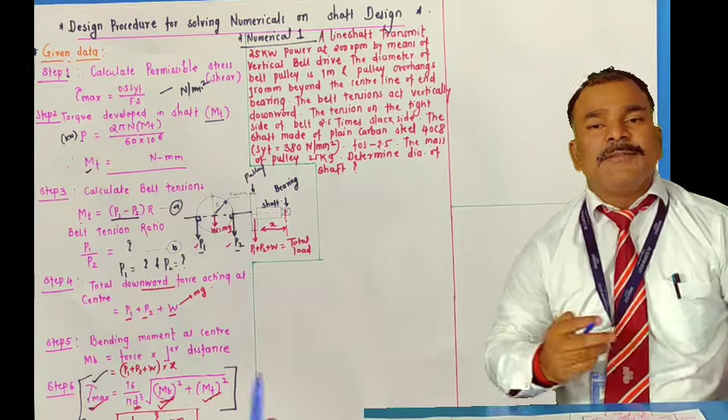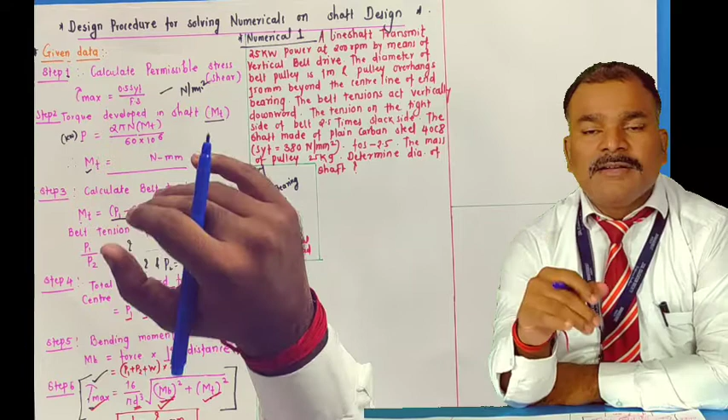Hello students. So now we will solve the numerical which we have seen in the previous session's design procedure. First of all, as I told you in design procedure, we'll have to read the numerical correctly, carefully, and then write down the given data. That would be your first prior step.

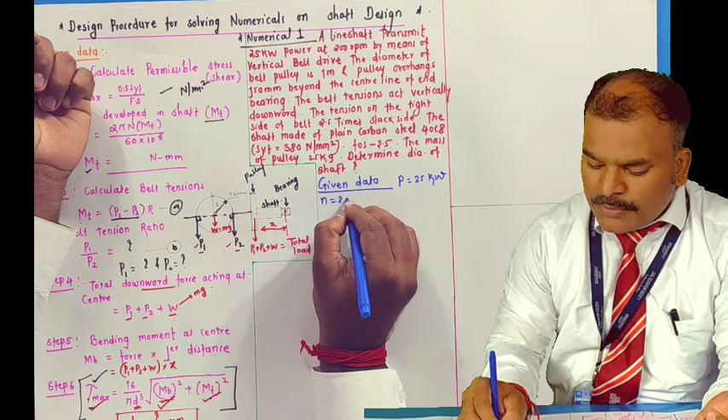So I'll read: A line shaft transmits 25 kilowatt power. So I'll write given data, P is equal to 25 kilowatt, that is 25 into 10 raised to 3, it will be in watt, at 200 RPM, by means of vertical belt drive.

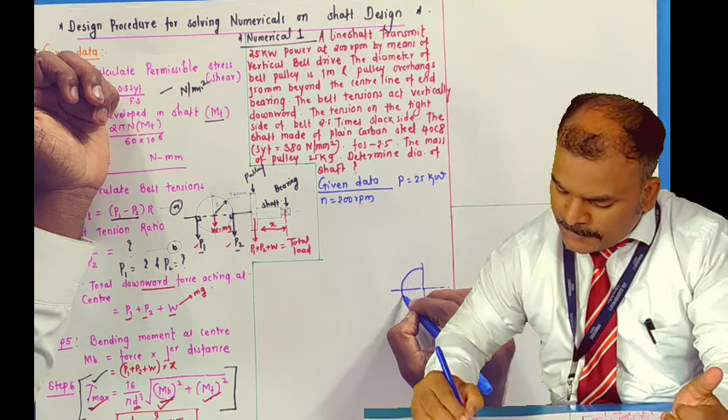So it is clear that belts are acting downward, tension on tight side and slack side is downward. The diameter of belt pulley is 1 meter apart. So I will draw here for sake of your understanding. This is the pulley, having diameter 1000 mm, so radius is 500.

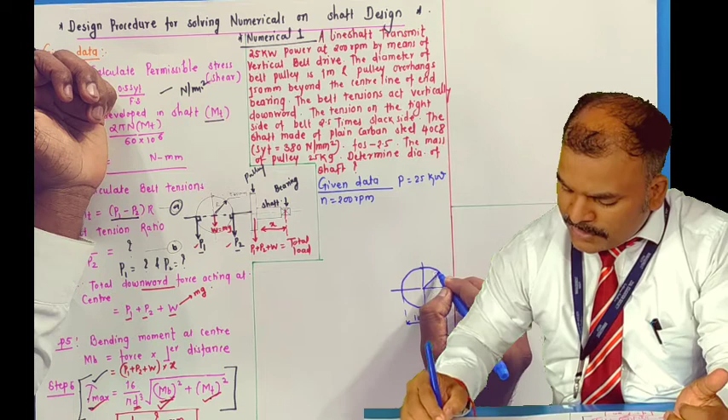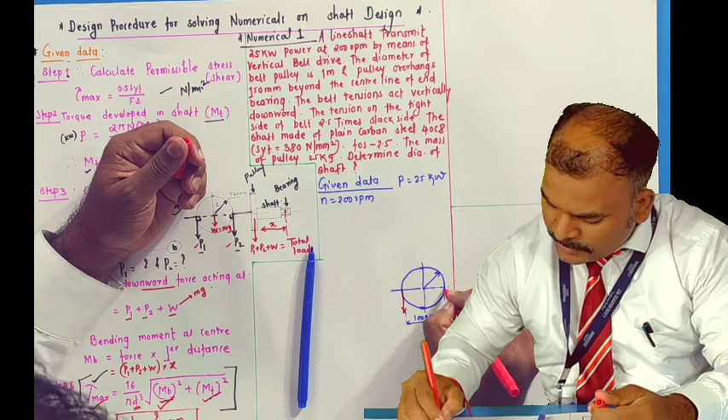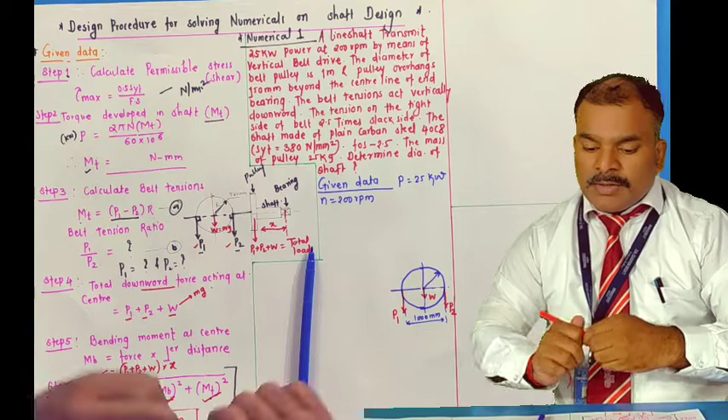Then on this the load is acting vertically downward. As I told you, P1 tension on tight side, P2 tension on slack side, and self weight of respective pulley. The diameter of belt pulley is 1 meter apart, 1000 mm, and pulley overhangs 150 mm beyond the center line of end bearing.

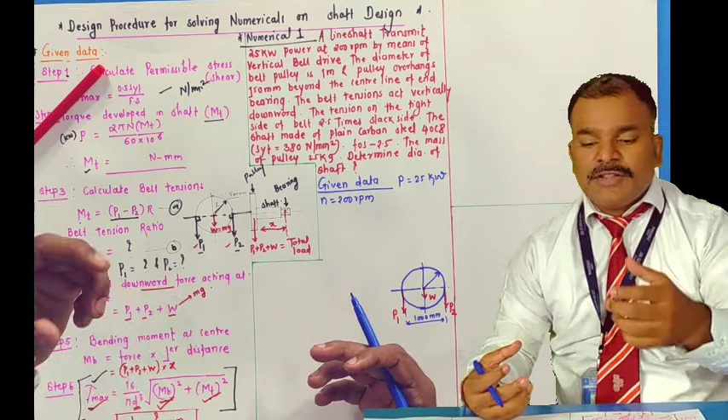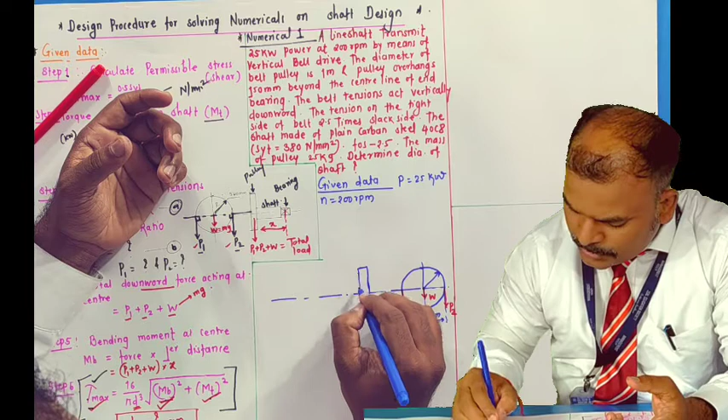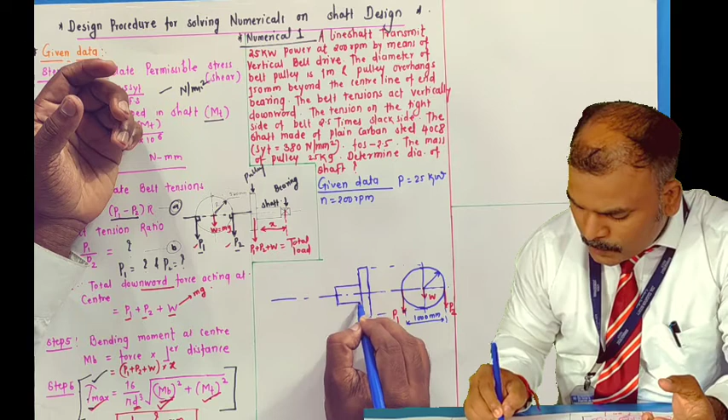Now it is very important to know where the end bearings are situated. Of course bearings are situated at end in most cases for giving the rotation. So I'll draw the diagram for understanding that. Here is your pulley structure, with respect to this. Then I will draw the shaft, and then I will draw here the bearings.

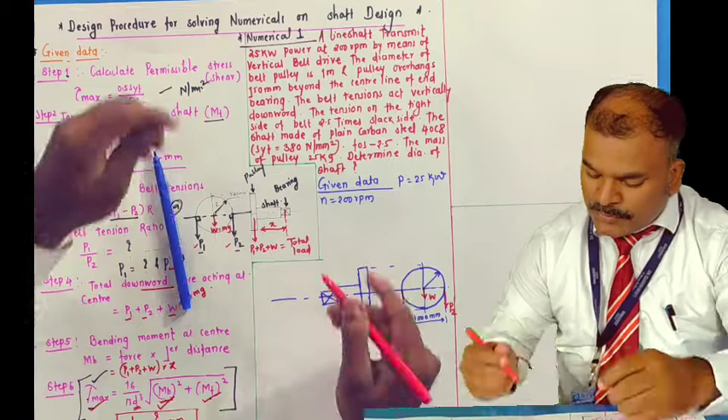Now, pulley overhangs 150 mm beyond center line of end bearing. So end bearing is this center line, and pulley overhangs, this distance they have mentioned 150 mm.

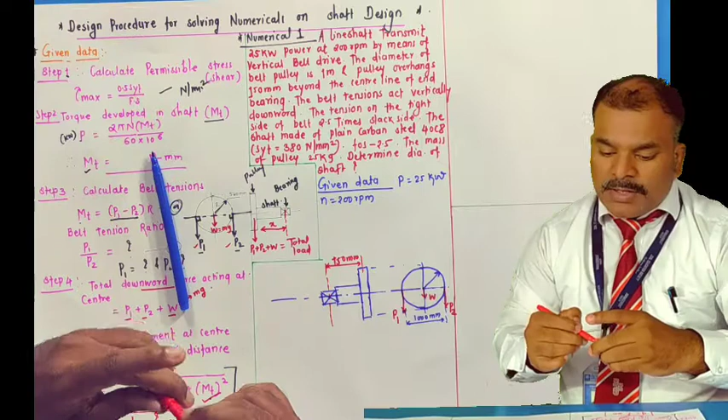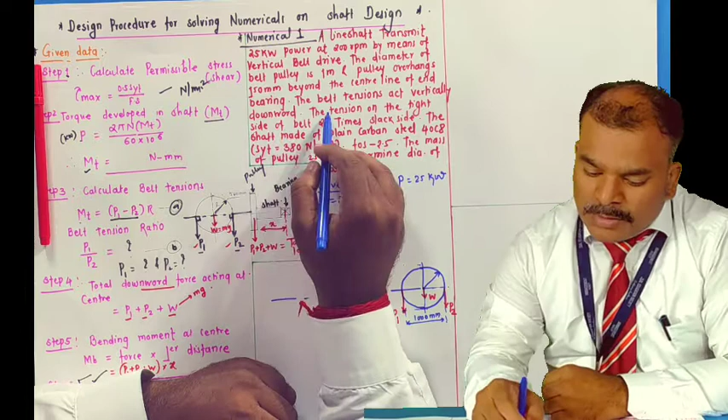After that, they have suggested the belt's tension acts vertically downward, so we have shown P1, P2. The tension on tight side of the belt is 2.5 times slack side. So I will write in given data, P1 by P2 is equal to 2.5.

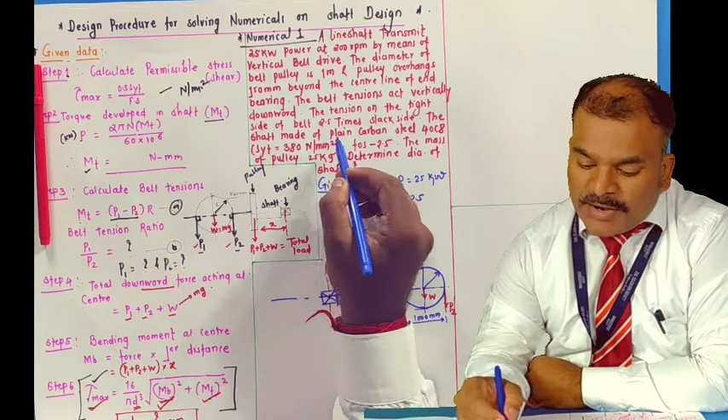They have given the shaft made up of steel, ductile material, steel 40 C8. Its SYT yield strength is given as 380 Newton per mm square, and factor of safety FOS we can say generally 2.5, and the mass of the pulley M is equal to 25 kg. Determine the diameter of shaft, that is small d.

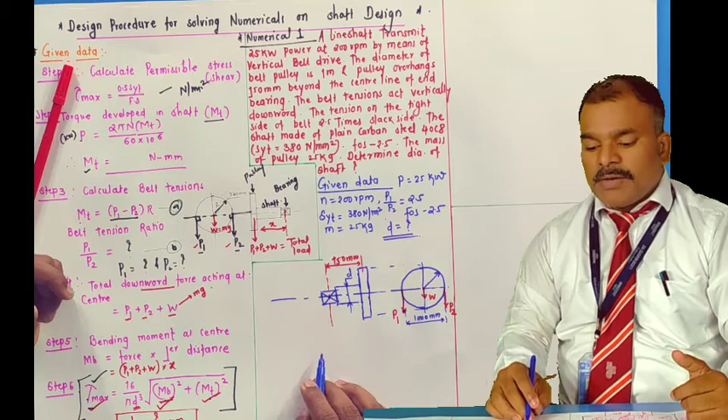So as I told you, you will have to write the data carefully, read the statement and write down like this way. I have developed the drawing also, so you can also do likewise, so that you understand easily. So given data is over.

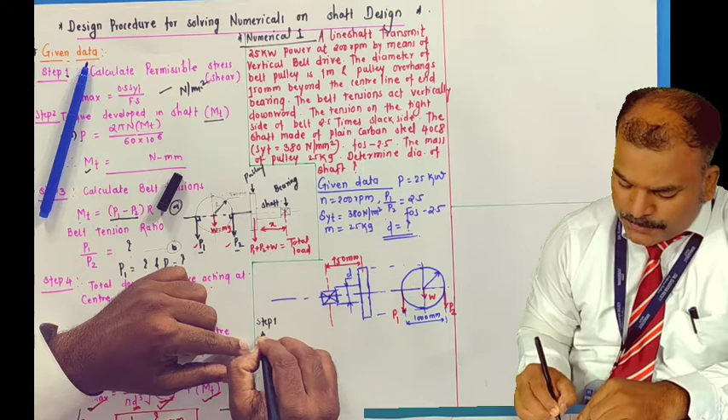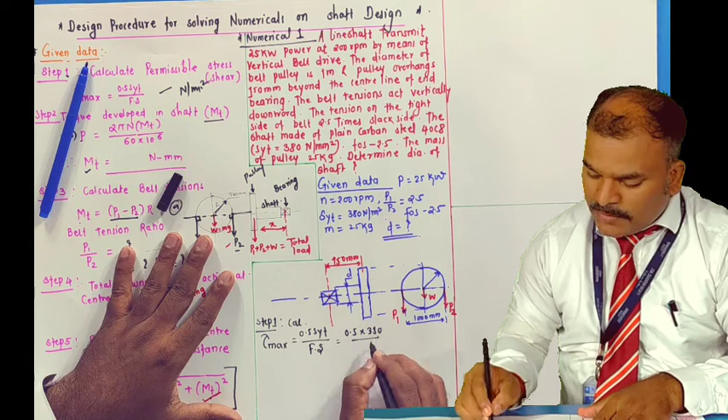Step number 1, calculate the permissible stress. So I'll directly write tau max is equal to 0.5 times yield strength divided by factor of safety. Everything is known, so I'll put the value: 0.5 into 380 divided by 2.5. Calculate this answer, it will become around 76 Newton per mm square. This is the first step, about tau max.

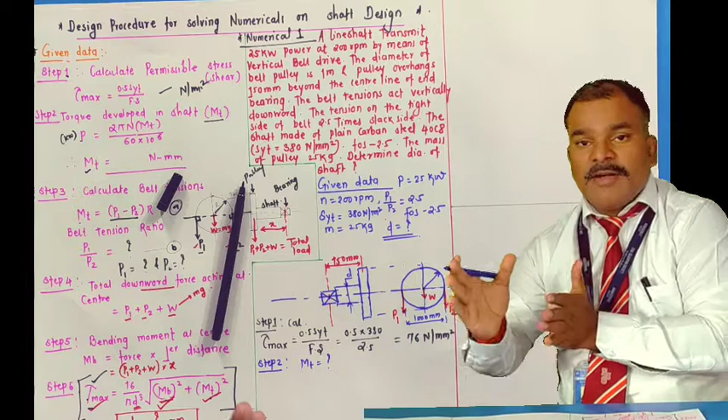Now step number 2, calculate torque developed. So I'll directly write MT is equal to question mark. In exam you can write the torque developed in the shaft detail and in bracket MT. So MT is equal to question mark, I need to calculate.

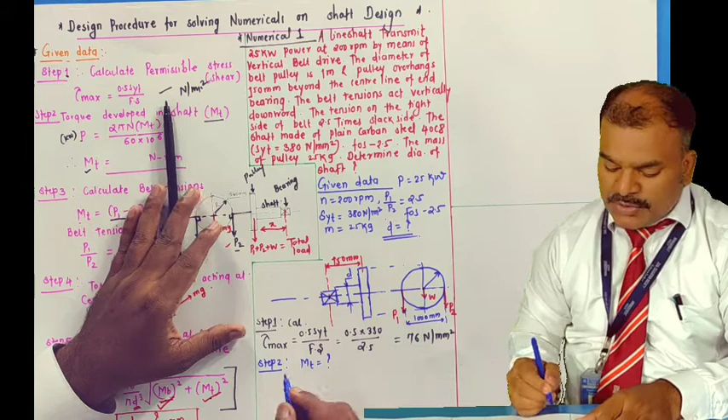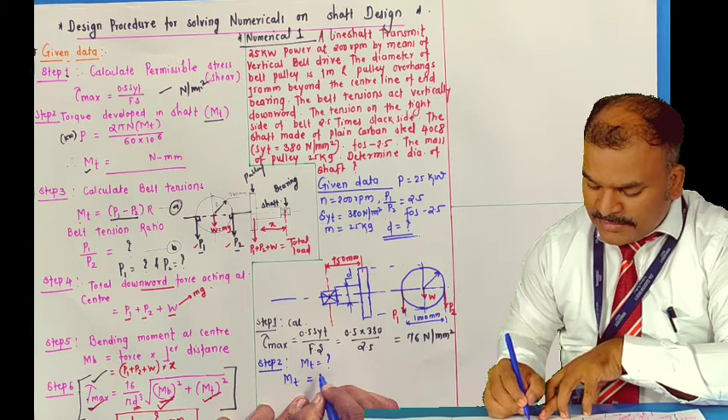So I will write MT is equal to, from P is equal to 2 pi NT by 60, that formula converted into terms of MT. So MT is equal to 2 pi N, MT... sorry, this is P is equal to divided by 60 into 10 raised to 6, this is kilowatt. So MT is equal to P, which is in kilowatt, into 60 into 10 raised to 6 divided by 2 pi N.

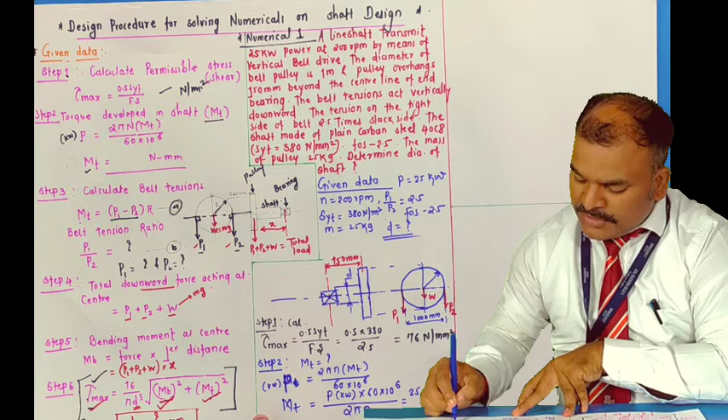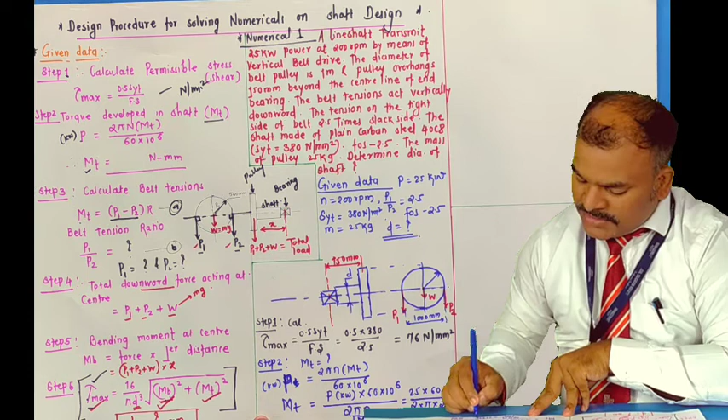So everything is known, we'll calculate very easily. P is 25, given data, into 60 into 10 raised to 6, this comes in numerator. At the denominator 2 pi N, N is 200 RPM given. So just find out, you will get the value of MT here, and that value would be in Newton mm. Calculate, the torque will be around 1193662.07. So this is the value directly coming for torque. Step number 2.

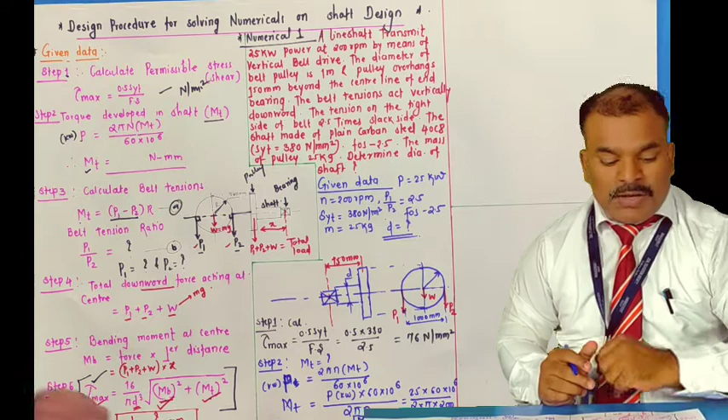Now we'll move toward step number 3. What is step number 3? To calculate the tension on tight side as well as slack side, so I'll write P1 and P2 with a question mark. That's what we need to calculate.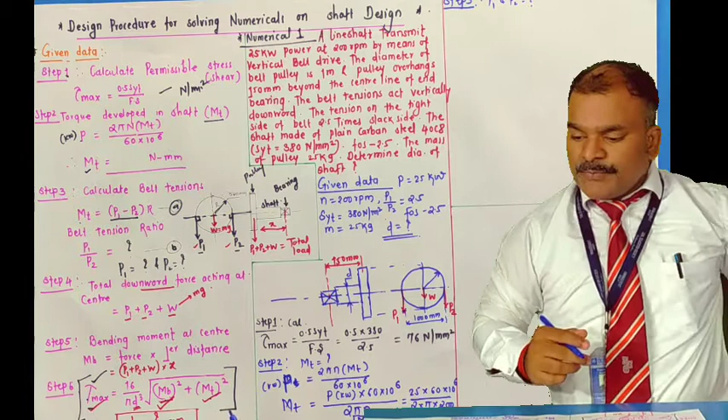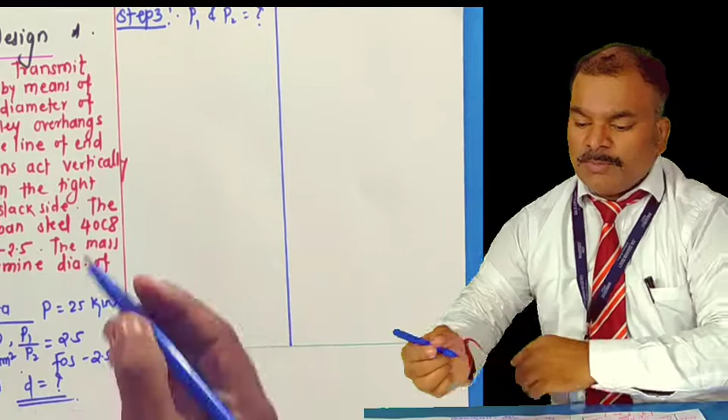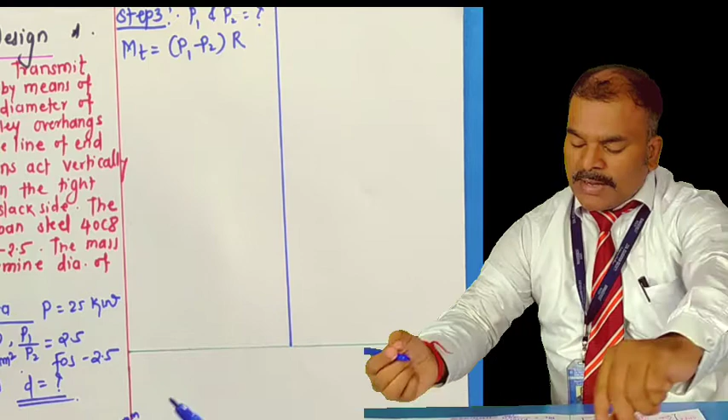As I told you, we know the basic equation: MT is equal to P1 minus P2 into R, that is radius. The pulley has 1000 mm diameter, so radius is 500 mm. P1 and P2 we don't know, but torque we know, so one unknown is there.

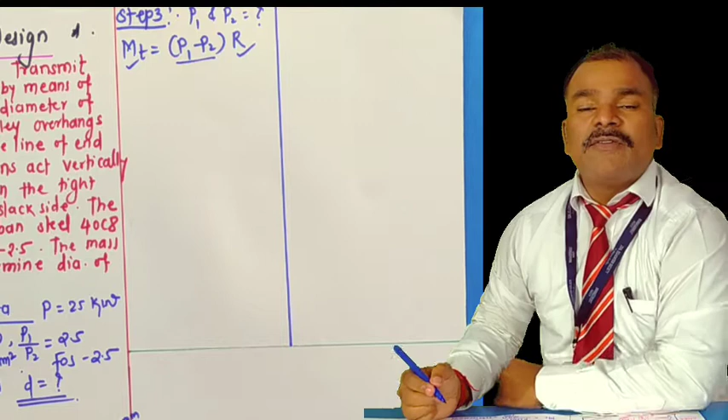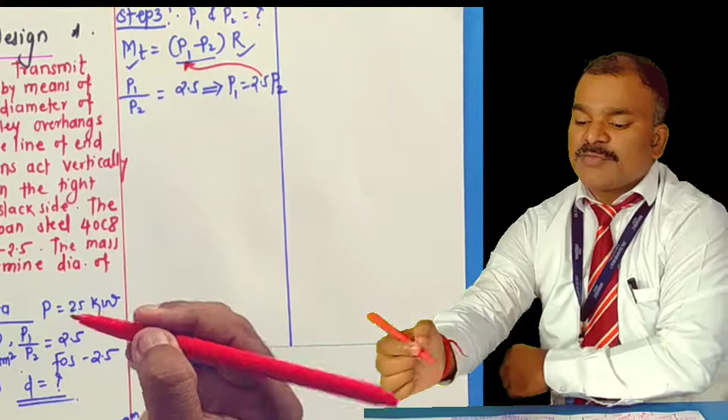So a better way is to select another condition given from the data. They have mentioned tension on tight side with respect to slack side ratio is 2.5. So P1 by P2 is equal to 2.5, meaning P1 is equal to 2.5 times P2. I'll put this value in the above equation to get P2.

I'll directly tell you the value of P2 is 1591.2 Newton. This will be the tension on slack side.

Now tension on tight side we can calculate, that is P1, which is 2.5 times this answer. I'll directly tell you it is 3978.7 Newton. These are the belt tension forces.

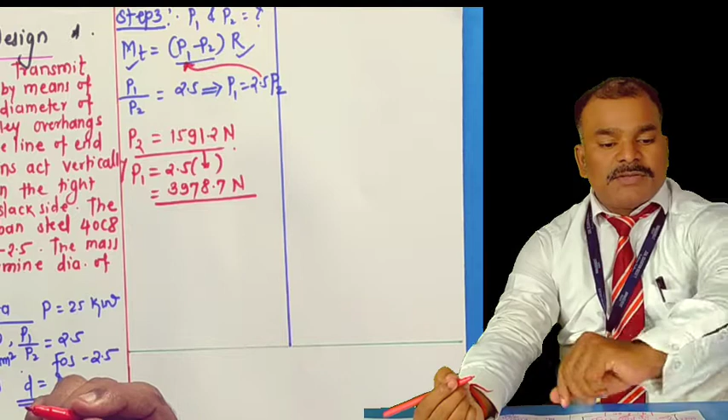So P1, P2 we got very easily in step number 3. Now step number 4 is to calculate total load acting on the shaft, which is equal to P1 plus P2 plus W, where W is nothing but M into G.

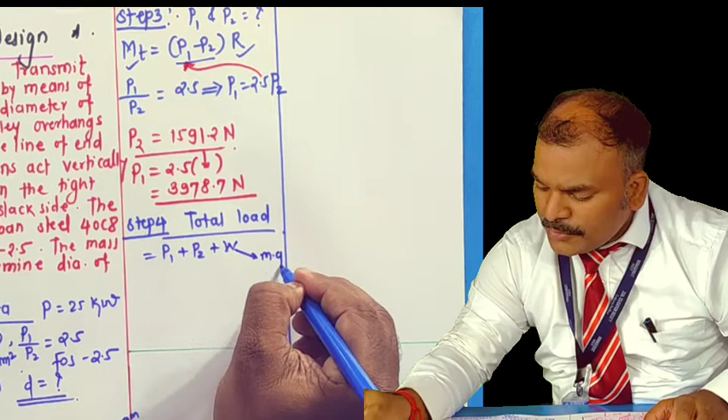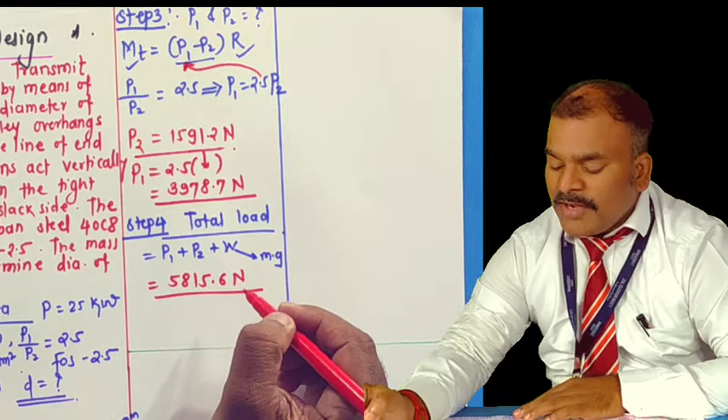I have considered P1 plus P2 plus total load at center, including self weight of the pulley, through which I get the total load as 5815.6 Newton. This will be your total load acting on the system.

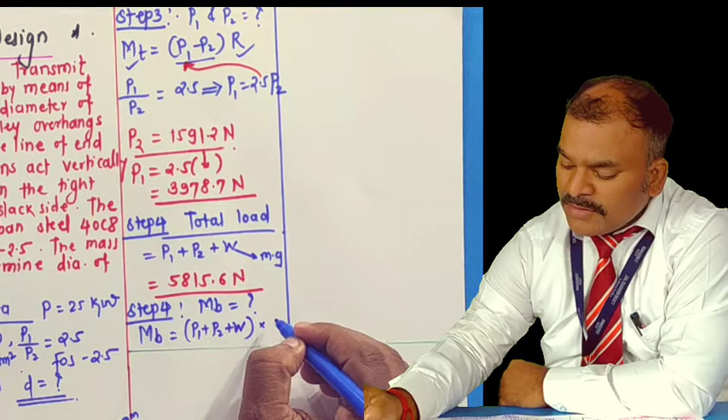Now our next step is to calculate the bending moment, step number 4. I'll directly write MB is equal to question mark. Bending moment means force into perpendicular distance. Here force is the total load, P1 plus P2 plus W, into perpendicular distance, which is very important. Now you see the structure.

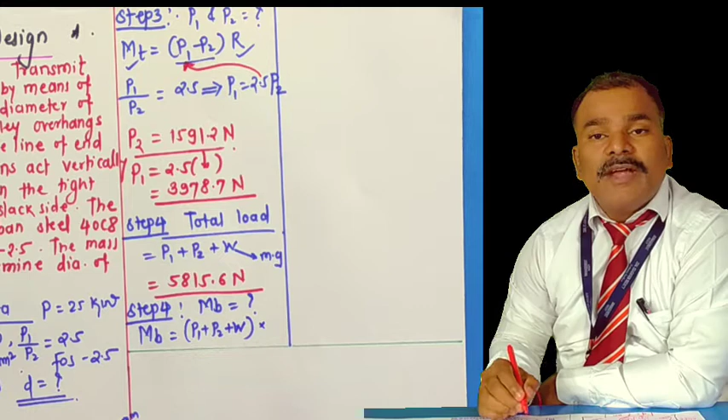See, this is the pulley with P1, P2, W acting here. This will be the total load, P1 plus P2 plus W, acting on the structure. Now I need to calculate the bending moment, that is force into perpendicular distance. They have given the distance 150 mm from the end of the bearing to the pulley, so that is the perpendicular distance.

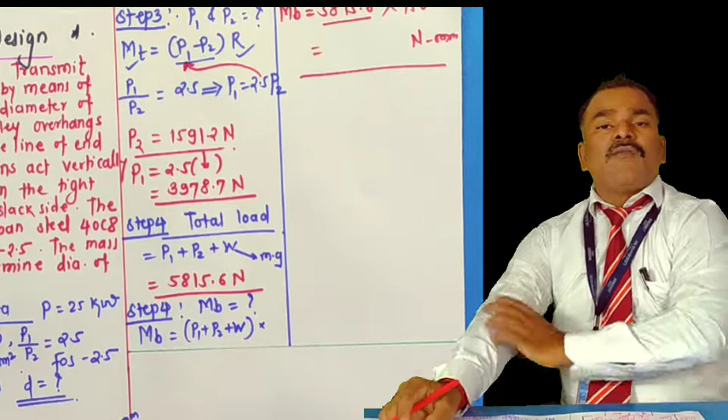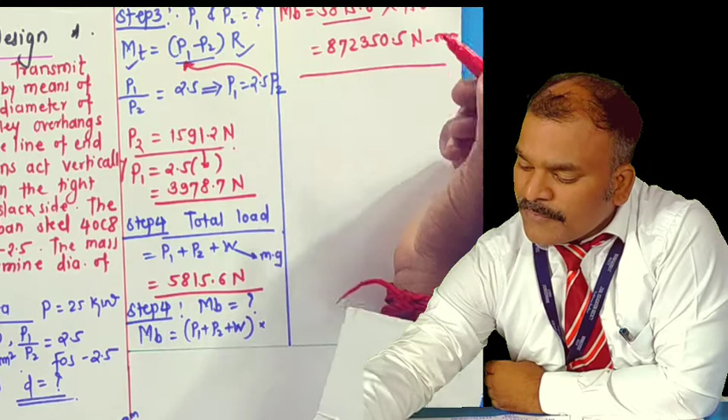My equation will be MB is equal to the total force, 5815.6, into the distance of 150 mm. Through this I'll get the bending moment for the given case as 872350.5. Around this much your value is for bending moment.

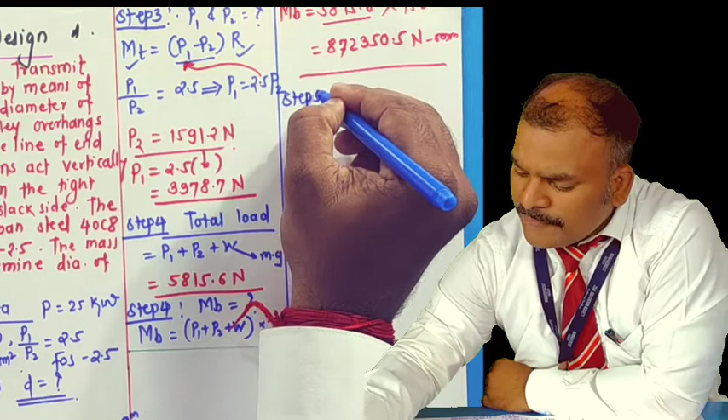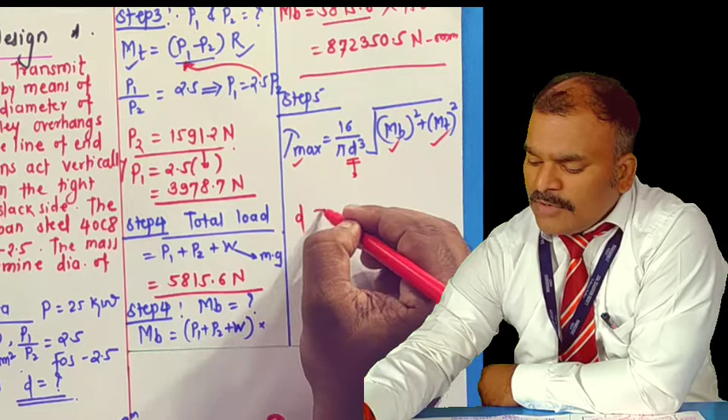Now we know the final equation, step number 5: tau max is equal to 16 by pi d cube, square root of bending moment square plus torsional moment square. We have calculated the bending moment and the torsional moment MT. Now remaining is only D, so just put all the values and you will get the diameter, which is in mm.

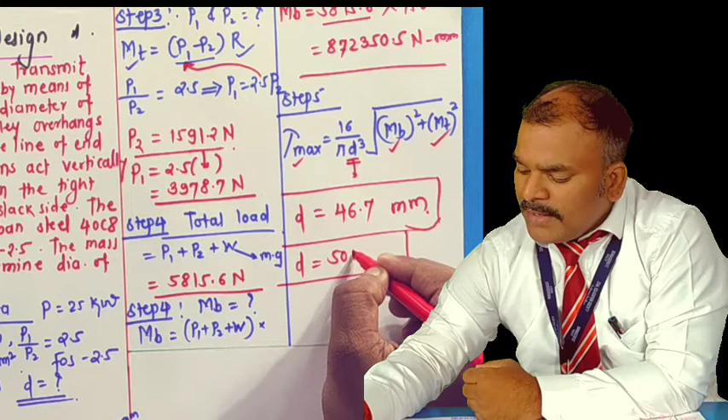Try to find it out, and from my point of view the diameter will be 46 point something mm. Always remember, while designing the shaft we'll have to take the diameter in terms of 5, because it is safer and better for manufacturing. So in your exam, if the answer is 46.7 or similar, round it up in terms of 5, giving 50 mm. So a 50 mm diameter shaft should sustain the load and maintain pulley rotation clearly.

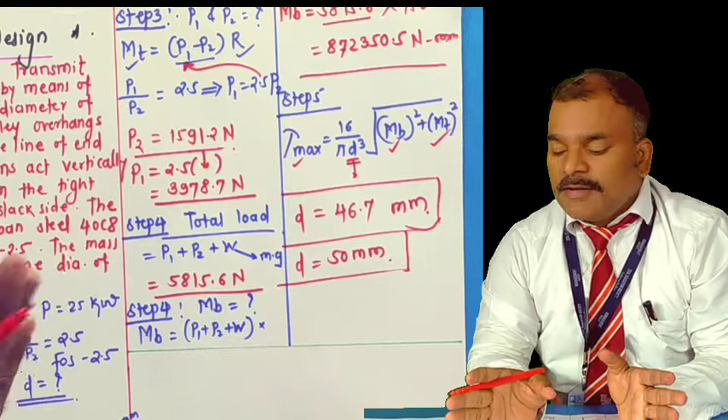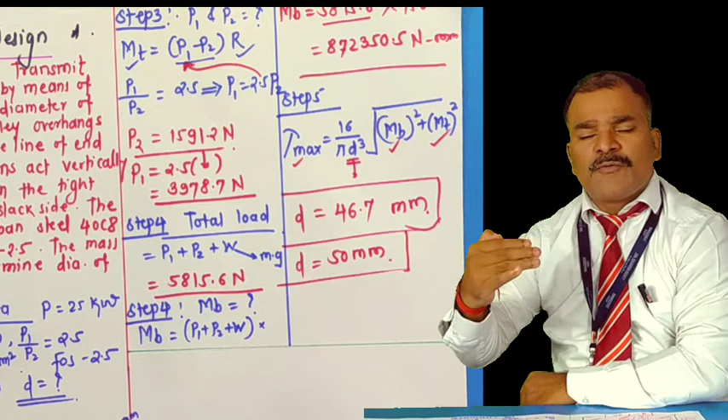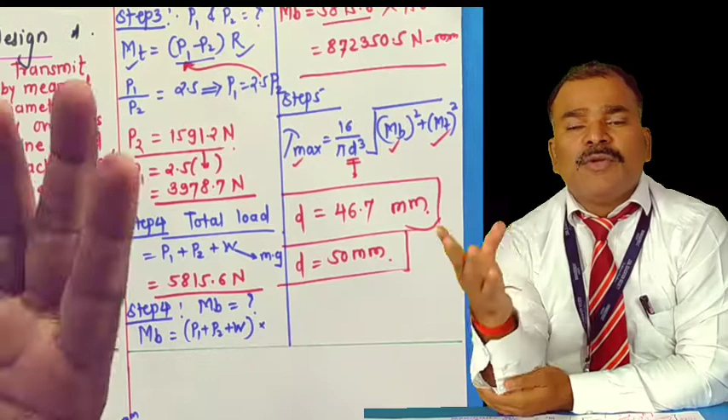This is the solution of the numerical related to shaft design. I hope you understood, just follow the steps: first, calculate the permissible shear stress; second, torsional moment; third, belt tension; fourth, bending moment; fifth, use all these values in the final equation, and we'll get the diameter of the shaft.